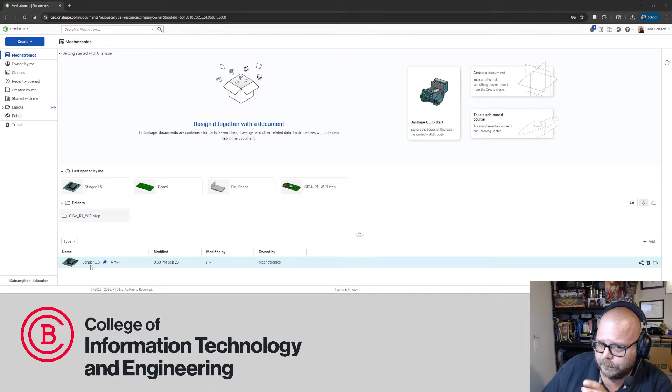But last week when we got started - let me open this up here - we got done with just the platform, the portion of what will end up being the main robot chassis that will actually accept the board. This is where we left it off, and I have to say, this was a hard thing to walk away from. I mean, I'm a design nerd, I would have loved to finish this guy.

But you run out of streaming content in a week's time. So I think the goal for tonight will be to see if we can get motors and batteries in this guy, at least, if not further. Of course, we'll keep going.

My plan for this series, besides just working on this redesign, is to go through my thought process - what a designer is thinking about as he goes through these things. So I'll talk through a lot of those thoughts. It's very stream of consciousness - there's a lot of undo, a lot of delete, that kind of stuff. So let's hop right in.

So we left off here with what we called the chassis, and these little cutouts are intended to allow - I'm going to make this guy transparent. I'm still learning Onshape and remembering where things are. There we go, make transparent.

Now, one thing I haven't figured out coming from SolidWorks is how to make this transparency permanent - in SolidWorks, when you change transparency, it stays that way until you turn it back off. But for now, these little cutouts in what will end up being a 3D printed chassis are to allow for the pins and solder blobs on the bottom of that main circuit board to fit, so the board will sit flush.

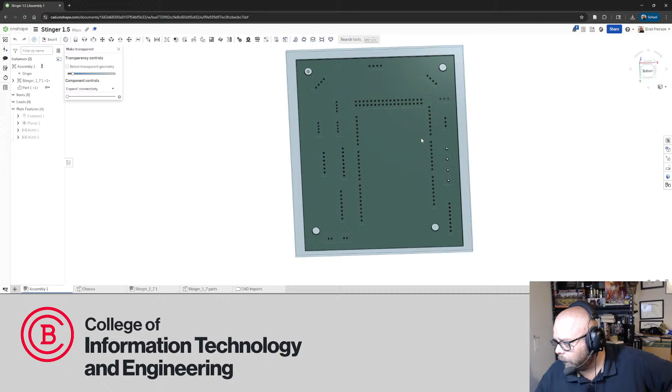If you watch the video from last time, we just guessed at how deep and how wide things needed to be. Looking at the actual physical circuit board, as long as we're outside the white silkscreen printing where the letters and stuff will be, we've got plenty of room. The solder pads aren't very big at all, so these pockets will be just fine where we've got them.

I'm going to flip over to the chassis, and I think the next thing to do will be to create the screw pockets - or rather, not pockets, the bosses, since we need more plastic. We're going to insert these screws. Let me switch to full screen and see if we can get a decent view.

On this version, in the original, I told the students not to worry about inserts. I've had very good luck in the past with just running threads into 3D printed parts, and actually this one will be better to show that. The thing I wasn't counting on when I gave them that advice was there's very little bite on these little M2.5 screws that hold a lot of these other accessory circuit boards in place.

So in all cases on this redesign, part of the robustness is going to be using these little guys - little brass heat set inserts. We design a hole for these to go in. There's a little soldering iron tip designed to fit right in the diameter. You get it hot and just push it in place.

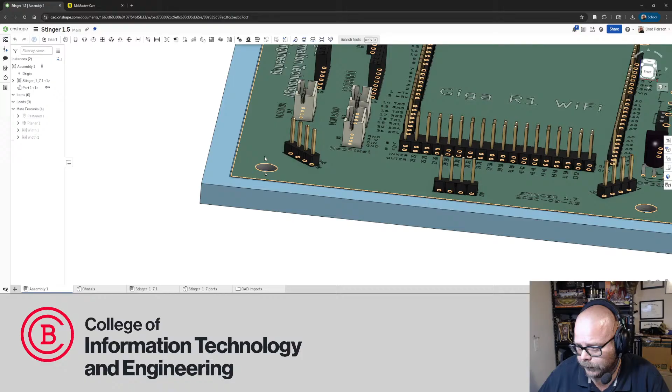So I know for a fact that the screws I've designed that circuit board for, this guy, that these were clearanced for a 1024 screw.

I decided we want to stick with all metric, because most of the other circuit boards that are purchased and get mounted to this robot are metric. So I want to stick with metric. It's a hole for a 1024, which, if I remember right, is an M5.

Now, my mind never converted to metric, so I usually cheat, and when I need help in the realm of conversion sizes, I use this little machine shop reference - I've been using this for like 15 years or more.

This is my go-to tap chart, so it tells me sizes for clearances. So an M5 - let's see, an M5, now these are tap sizes, that's not really what I wanted. What I probably want is something with a major diameter. It does... well, M5, 5 millimeters should be the major diameter.

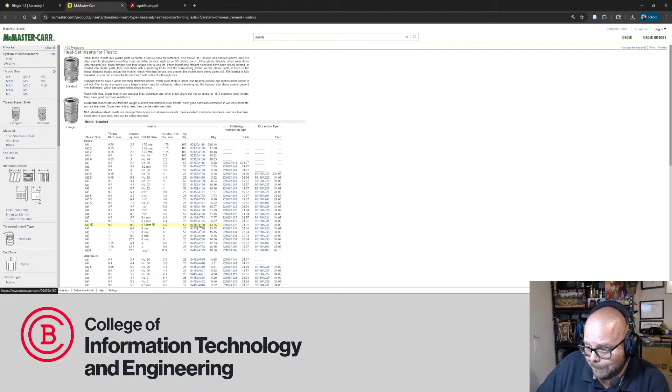My thought here is I want the deepest insert possible - not that I'm necessarily going to use the deepest one, but if I design for the deepest insert possible, that means it'll accept any of the shorter ones. So for M5, we come in here, they've usually got a drawing telling me maximum hole diameter is 6.5 millimeters.

General rule of thumb, if we were tapping this hole - and I'm not going to tap it - is that we need a wall thickness, or the boss, to be double the diameter. So we would add a screw boss at 13 millimeters, and that's kind of what I'm going to stick with. There's even less stress on this if I decide to heat it when assembly happens, so that rule may not strictly apply, but that's what I'm going to go for anyway.

So 13 millimeters, converting again on a handy dandy graphing calculator - I'm even a nerd, it's the same graphing calculator I had in high school.

0.511, we'll call it a half an inch. Now I have to think, how deep do we need? That drawing should have a minimum thickness of 10.3 millimeters. Back to the conversion, divided by 25.4 is 0.4. So I'm going to just go 0.5 deep and 0.5 in diameter.

I'm going to sketch on this surface, and actually I want to do it in the part, not on the assembly this time, because these are going to stick down. We're going to sketch, give me a good straight-on view, and just start dropping in circles. Right now it doesn't matter where or how big, because they're all going to be the same.

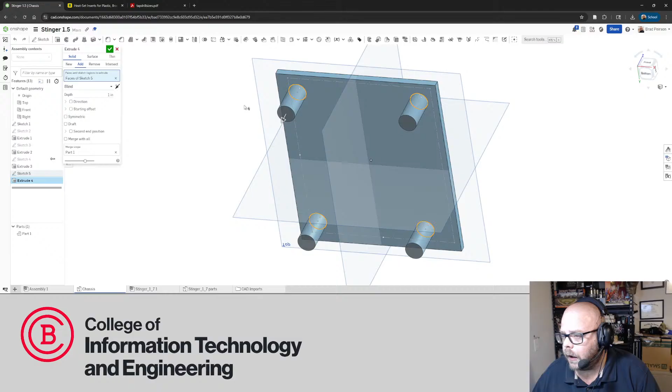That's all we need for these right now. Grab that sketch, extrude it, and we definitely only want a half-inch. I don't need the full half-inch off of this bottom surface though, I need the half-inch off of this surface. So I am going to attempt, let's see, blind is correct, but there should be a starting offset?

Is that right? Nope, we don't want to do that. I thought that there was a way to send this. We don't want to do up to the end, these are all end conditions, so that's not gonna be what we want.

Now the question I'm asking myself is, did I really want to sketch it on the bottom? Because I could have sketched it on the top, extruded a half-inch that way and just been at a half-inch or whatever. The other option, if I want to get lazy, is just call this good at a half-inch from here. But part of my goal in the back of my head is to keep this thing as light as possible.

So what I'm going to do is see if this will allow me to change the sketch plane. Let's see, rename copies, show dimensions, add selection, hide. Hiding doesn't do me much good. What if I just, can I edit? Look at you, sketch plane. What if I change you to here?

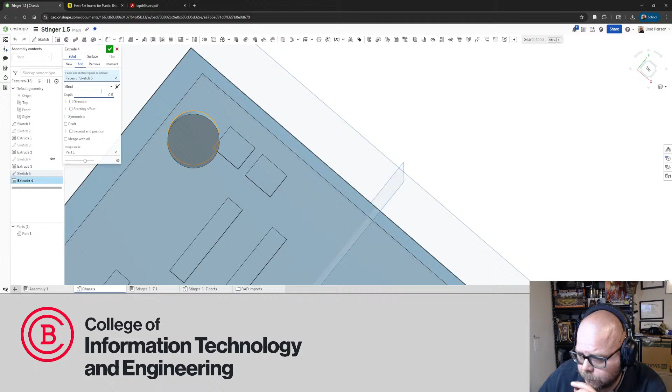So I'm going to extrude this. I'm going to give it my half inch, 0.5, because overall, whoops, wrong direction. So edit, wrong direction, that way. So now from here, if I select both, I should have a half inch, yep, down here on the right. And here's going to be something less, so 370.

Now, that's ugly. We're probably okay because there's so much extra clearance in all of these pockets. Did it hit any other ones? Doesn't look like it. We're probably okay.

I don't like it, so I'm going to see if I can't, because we didn't define the screw boss features based on these pockets, I should be able to grab them and drag them up above. Will you let me? There we go. If I drag them up above, maybe. No, did it? No.

That's the cutout, yes. Oh, it just took it, okay, it just took it a second to re-render. Yes, so now my screw bosses are above, it cut through, everybody's happy. I do that quite a bit, sort of cheat it, to get things to fit that way.

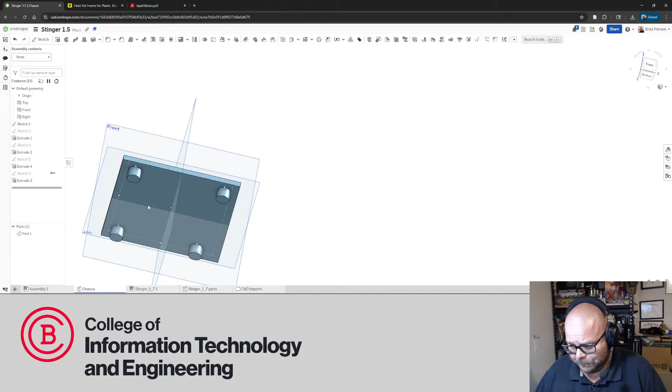So next, that's right, and so for a similar reason as what I just did, I'm not going to put the holes in right now.

I envision drawing the motor, adding the motor mounts, and they'll stick in a ways. And if they happen to cross these screw bosses, I don't want to fill in those holes, because there's the potential to have a lot of features that I have to drag up above and remember what things are and stuff, and I don't want to do that.

In the case of the holes for those inserts, I think it's going to be better if we just leave it and do the holes after, and we can do that anytime. I've got the sketch, right? I can drop holes right in there, be nice and concentric. Everybody's happy. So I guess let's go after the battery.

And for that, we were at Adafruit for the battery. It's the Adafruit website. And I'm working from memory here. I do have the bill of materials, but if I remember, we were at this guy right here. What is their part number? So 5035 is Adafruit's part number. A 10,000 milliamp hour battery.

Now, it turns out with the actual use of these robots, this was insanely overkill. I want to say I ran this thing for 8 hours a piece at 3 separate career fairs and never had to charge one of these robots. So insanely overkill. I like it though. That means that I'm not likely to be stranded in the middle of a career fair with dead batteries. So I'm going to stick with this one.

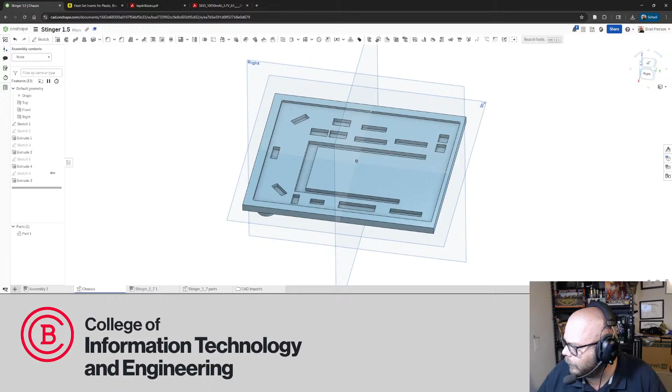So let's go ahead and pop in a battery pocket, shall we? We want to flip back over to our tabs. Now, if I want to show the top view of this thing. So with how that is oriented, I've got the battery in the back of my robot, and we're oriented this way. So we're going to be adding the battery pocket on the bottom of what's the top in this view. So here. And I can extrude it off of this face or the bottom. It's not really going to matter much. I think I'll just do it off the bottom.

Let's sketch. We'll create a rectangle. I think I actually want to draw this rectangle off funky, not centered, on purpose, because I want to grab the center. Can I grab the center? Will you let me? Well, when it won't let me grab the center, I'll just drop a dot in. Drop a point, grab that point and this edge and constrain it to the midpoint. There we go. So now we're centered.

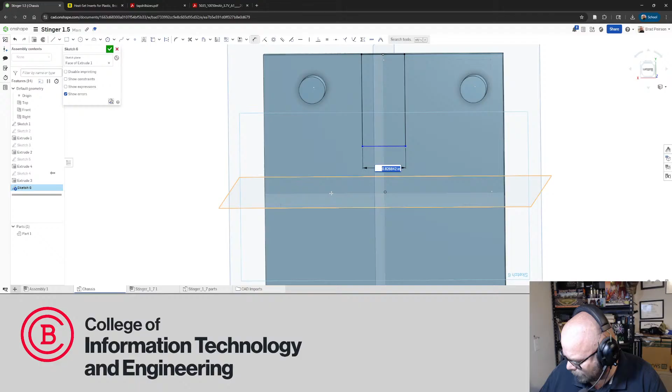What did I say I had to have? 2.25 wide, but we've got to add wall thickness because we're going to be extruding the outside and then extruding a cut into it to actually sit the battery in. So 2.25, dimension, where are you? Right there. 2.25 plus wall thickness. 1/4 inch is a little beefy. So if I went 2.5, that would give an 1/8 of an inch per side. We could try it and see how it feels once we get it in there. So let's do that. 2.5.

And this is exactly why I didn't want to cut into that hole, because when I extrude this, it would have filled in the hole, and then I would have had to remove features. So a little bit of planning ahead. Not that I plan everything ahead, but so 2.75. If I want an 1/8 inch wall, I really only need an 1/8 of an inch because the back is going to be open. So 2.75, make it 2.875.

Is that actually going to work? Now that I'm looking at my physical one, I'm looking at where those screw bosses ended up, and I'm thinking I'm not going to end up liking that placement. If we cut into this screw boss too deep, we won't have enough wall. We should have enough wall for the brass insert, but what I'm worried about is the brass insert's going to impede on the inner area where the battery needs to sit and not give us enough room to squeeze the battery in there.

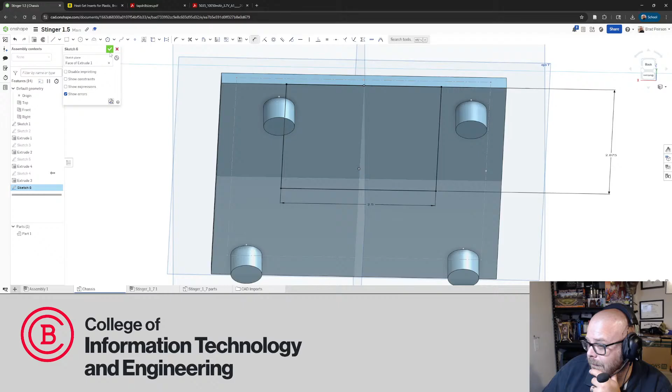But the beautiful part about CAD is it can be undone, so let's do it. Why not? Extrude out. Oh, it helps if you select a sketch. Select the sketch. We definitely don't need the inch. 0.75. And again, if I'm shooting for an 1/8 inch wall, 0.875 gives us that, right? If the battery was 3/4, 0.875 gives us that. It looks kind of funny, but if the goal is light, at some point funny might be the order of the day. So for now, I'm going to call that good.

I'm going to go here and do another sketch to produce the battery cutout. Now, the question, how fancy do I get? Because this battery is shaped like what in SolidWorks would be a slot. I don't think there's a slot tool here. Maybe buried in one of these guys. There's an ellipse. Yeah, I don't see a slot. This shape, rounded on the ends. Do we want to get fancy and make the pocket for the battery rounded, or just cut a rectangle? This one is just a rectangle, but this one was designed to go in sideways, not lengthwise.

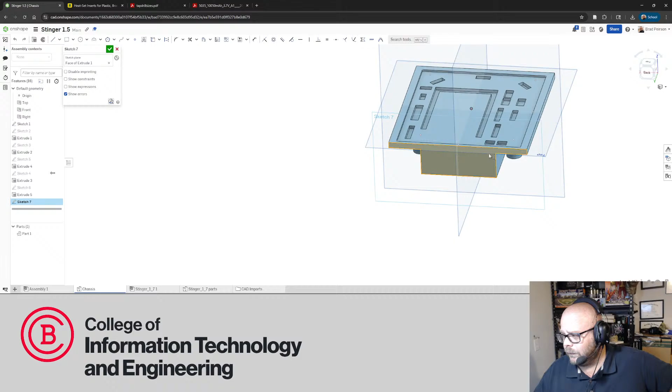Let's do it. We're 3D printing the thing. We can get away with some nuts. This is already well out of the realm of anything I would design if we were shooting for machining. If we were, I would very much be going the route that this one took, where we start out with a block roughly the size we need and start cutting into it. The whole idea of starting minimal and adding on is that I know I'm going to 3D print it, and we can get away with some crazy stuff on a 3D printer that I wouldn't ever attempt if I were machining.

So let's sketch this here. I know I want an 1/8 of an inch wall at least on the bottom. So let's do that, because that's the way I designed it. Once we get all the rest of the dimensions of the battery in here, we should be good as far as clearance. We can't go too tall. Remember, we've got to be under this level in order to give our pins room on the circuit board. So that's going to be the driver, to make sure it's low enough. That height was 3/4 of an inch; I'm going to bump it up.

I mean, 5 thou should be okay. That will probably end up snug. Like I've mentioned in the past, I don't really have the printers at Baker dialed in the way I do my Ender here at home. Like I know here I can hold 5 thou without a problem. The ones at school I haven't played with, I don't know what they're actually capable of.

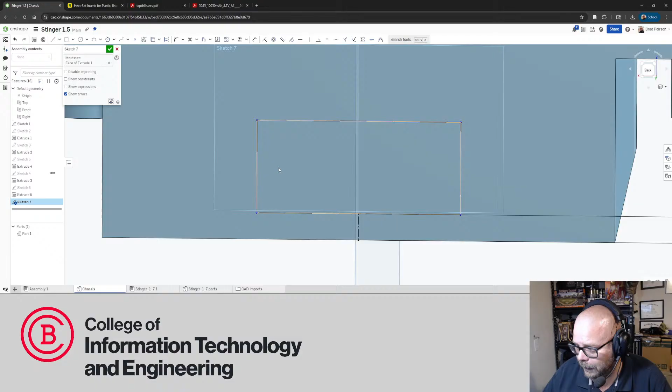So what I did was grab a line from the midpoint of my sketch to the midpoint of this face, or this edge down here. I am going to set that to construction so that I can set it vertical, and that's now going to center my battery pocket, or what will be my battery pocket. Now, width was 2 1/4.

Actually, if we're going to plan for the fact that it's oval, that 2 1/4 was this 56. And they say that that's max. I got to be honest, I don't trust that that's max. So if you see max on a drawing, I should be able to create my pocket at, say, 56.6 millimeters, and it'll fit in every time. I don't trust that they're holding that. I just don't. So we're gonna go with the safe play.

However, to make that work, and we want to go rounded, so I'm going to construction both ends because I don't have a slot tool. And then I'm going to grab arcs and make one. Looks like I have construction still on. We can fix that. So drop those in. They're already fully constrained. They should have tangency. Oh, they got midpoint, even better than tangency when you're doing this. So select them again and unconstruction.

There we go. Now, because I have the dimension from here to here, I need points there in order to dimension it. So I'm just going to drop points there, and that was the 2 1/4. I'll give it 10 thou, 5 thousandths a side. So 2 1/4 becomes 2.26. That somehow seems as if my math was off, does it not? No, 56.6 is correct. Is there another? Okay, I just haven't defined that yet, that's all.

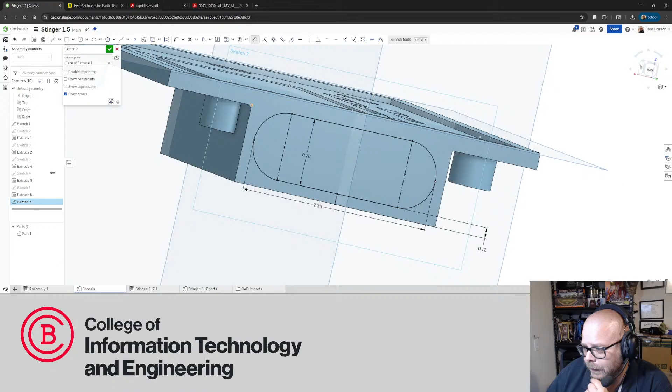You know what I could do? I could drop this down, 0.12, to account for that extra 5 thou. Now I should be perfectly flush with this. Who's going to stick a micrometer on my 3D print to make sure that that was exactly 1/8 of an inch on the bottom? You know what I mean?

So now grab that sketch, extrude it. We want to cut, so we need to hit remove, and 1 inch isn't good enough. It's 2.75 on this one. I'm going to make it even deeper, because I know for a fact on the end of these batteries are little boogers of the shrink wrap. Come on, slide out of there. Well, I guess a yank is about as good. Come on. Just get enough to get my fingers on the actual batteries.

So there's some extra goodness here where the solder connections are, and where they're welded on the end. They're not perfectly square. I'm going to give it 50 thou on the inward side and hope. At the end of the day, if it sticks out a little bit at the back, it's not really a big deal. So we'll go with that. If I give it 50, that's 2.8, right? 2.8 deep.

And that gives us a very, very thin wall down at the end. Ouch. Ouch. But that should be okay? Question mark. Accept that. Again, I mean, this is CAD design. There's nothing here that can't be undone. The reason to go through all these thoughts and the design process is it's a lot cheaper to change it right here than it is after I've, you know, spent 12 hours trying to print this thing.

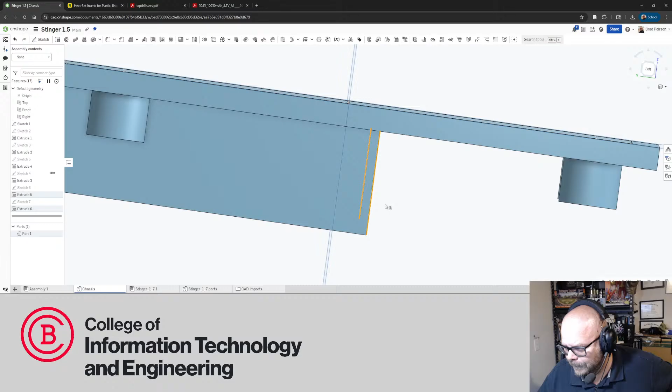Why don't I do it now? I mean, I just got done saying that things could be undone, so let's give it a good healthy fillet. What was the radius on this? 3/8. Okay, because in my head I'm kind of thinking in the end I would like this to be a nice radius that sort of matches the inner pocket. So we'll give it a good healthy radius and see if I can fit that all the way around. 0.63 is definitely not big enough. What did I say it was? 0.4, something like that. Let's grab that. I mean, close enough for when it's printed in plastic, right? Not perfect, but let's grab that.

What happens if I do it here? Okay, it is not going to like that, I don't think. If I remember right, when it turns pink like that, it is something it's not happy with. Let's try it. Yeah, it didn't like it. Edit. That would be the last one there. So it likes that, and then we can probably get that same all the way around if this were the end game, but what it really doesn't like is that end. And probably because we're filleting into the pocket. So I'm going to go ahead and make that deeper.

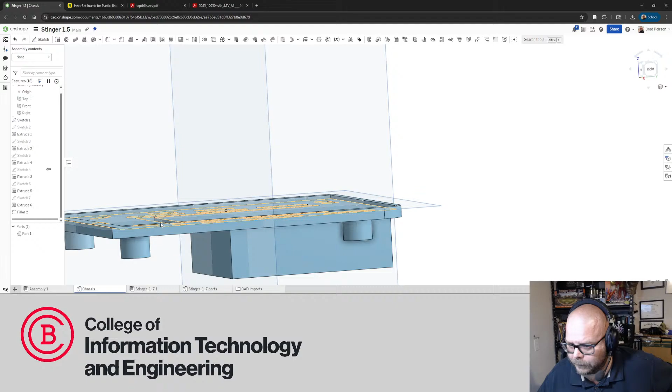I don't like that. But like I said, I'm saving all the filleting for the end because as I start to add more and more features, what I've found in the past is if I fillet this corner, in fact, I can do it and delete it. Let's fillet that corner. What I have found is that if I do it now, inevitably, 10 hours from now toward the end of the design, I'm going to want to dimension something to this corner and it's not there anymore. So then I got to go back anyway and delete the fillet, and it's just a mess. So why bother? So let's delete the one that's broken, delete the one I just did. So I leave it till the end most of the time. And that wasn't always something I did. That was something that I learned to do after getting my ass burned many, many times.

So really what I want to do for now, that's the cut. That's the meat that we're cutting. I'm just gonna add some to this. For now, let's just go 1.125. Add a quarter inch to it. Whoops, that's depth. Cancel. I've got to change the sketch because that's how we defined it. Edit. So if I want to add a quarter inch, where are you? Okay, so it's going to be 3.125. I still don't know if that's going to work for the big fillet I want maybe at the end, but let's see.

Let's try it. I go here now. Now it's happy there. If I go here, it's happy. Okay, so that tells me that'll be enough. And then can I still go around? Whoops. Get rid of that face. There you go. I want that edge. So, we can play around later. At least it's happy doing that, right? Can I select that? Cool. So, I mean, that'll be kind of a cool profile when it's done.

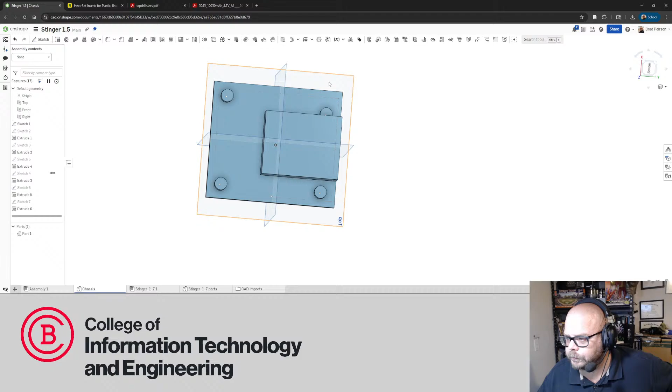So yeah, that's enough material there. How big do we look? It's not terrible. I mean, it's a quarter inch, right? Or 3/8 maybe. So it's not a ton of extra weight. In the future it sets it up for kind of what I want it to look like. So we'll call it good. Yeah, and that's really, for now anyway, all that's left for the battery.

Now I can foresee, so out on this edge of the PCB, let's go to the assembly. And bring it back to the view we had. This where it says power boost. That's the booster that takes the 3.7 volt battery up to 5 for the rest of the sensors in the Arduino. So eventually the battery wire has to go out and plug into a PCB that will be mounted on this connector.

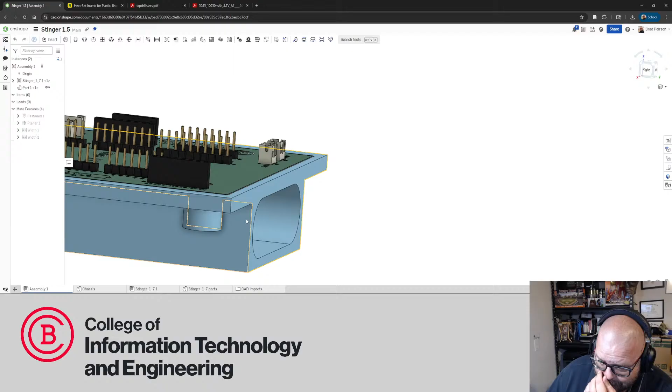We can and probably should in the future, when we get that far, make a nice little cutout here so that the wire has a place to rest. And maybe we throw a piece of electrical tape over it to hold it down, or we even design a cover or something. I don't think I like the idea of a cover. I kind of like the idea of leaving it open, but you get the idea.

Something, we can come up with a place to put that wire later, or realistically, it can just sit out there hanging in space. I mean, we've got nothing too complicated. The power board or booster, let me unplug the USB here. The booster is something, where are you? Something very small like this.

The battery, in the view I've got right now, sits on just like this, and the battery plugs in on this outer corner. So we can just leave it out in space if we want. We can tuck it in, come up with a nice channel to run it through. All kinds of options. So we're going to call that good for the battery for now. The battery should slide right in there, be happy.

The next thing I would like to do is go with the motors, and get the big blocks similar to what I just did for this battery, get similar features in there for the motors. And actually, in looking at this, I think we're okay on that screw hole. This is the way my mind works. I just jumped thoughts like 6 steps ahead. I'm still not going to put the holes in because we're not done adding plastic yet, but we're probably kind of okay.

So motors. I'm going to pop over. This was the tab. Those also came from Adafruit, and like I said, I do have the bill of materials. I'm being incredibly lazy and not opening it, and I'm just going to find it on here. It was their gearbox motor. It was the TT motor with the metal gearbox.

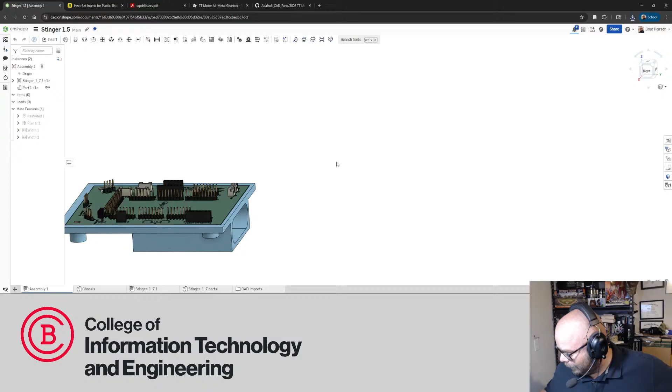I can come here, insert, import rather—step. I'm going to create this composite. Again, I don't fully understand this composite part because sometimes instead of an assembly you get one part, or sometimes it doesn't—it gives you an assembly anyway. So I click it and hope. I got to be honest, that's sort of what I'm doing. Give it a second. All right, it's been imported.

So we got a part. We got one part—looks like it came in as one part. I'm kind of curious if...

Now I've got one of these in my hand, and I'm going to point something out when it comes time to put this in the model. But first, I'm going to try to get it in the assembly.

I want to see if it's actually a part, or if I drop it in here, things are going to move. So let's do that—let's insert. It doesn't call it a part.

Composite part, there we go—TT Metal Gearbox. I don't care about the color, I can set appearances and stuff later. In fact, that's something I'd like to play with. I was Googling around, and it sounds like this has a pretty cool render functionality.

So I'm just going to mate this guy. Though if the whole thing moves, I mean, it's not looking like an assembly to me, so I think we're okay there. The whole thing moved. So I'm going to get rid of that because I actually don't want that planar mate, since we haven't put any material in to mate this thing to yet. Let's get rid of that.

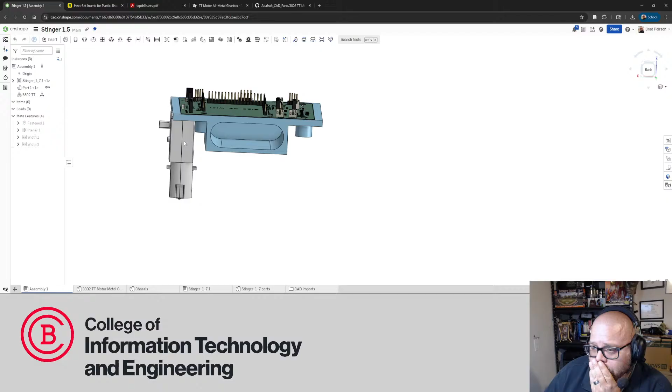Now we have to sort of make some decisions because I don't have a great reference. I would prefer a technical drawing. And while I was able to find this GitHub repository, I was never actually able to find a good CAD drawing of the thing.

There's nothing in here that I missed, right? STL is not going to do it. JPEG's probably not going to do it. Nope, that's just a picture of the model—I got all excited there for a second. So let's go back—yeah, none of these, STL, step, none of these are what I need.

So I don't like this. I would prefer a drawing, but there's two ways I can do this, and I'm actually going to do both because this makes me nervous. I need to know the hole pattern, the mounting holes—so there's 1, 2, 3 mounting holes, I need to know where they're at. I also need to know the dimensions of the motor itself.

What I'd like to do is inset it into plastic, sort of the way that—I need to invert or de-invert my camera for the next stream.

But sort of the way this one is, where it's cut in, I want to do the same sort of thing, just to give it a little more support if things get torquey. They shouldn't, but I want to have some plastic there to help it out, not just rely on the screws that are mounting it. So I need dimensions off of this guy in order to know what I need to model here.

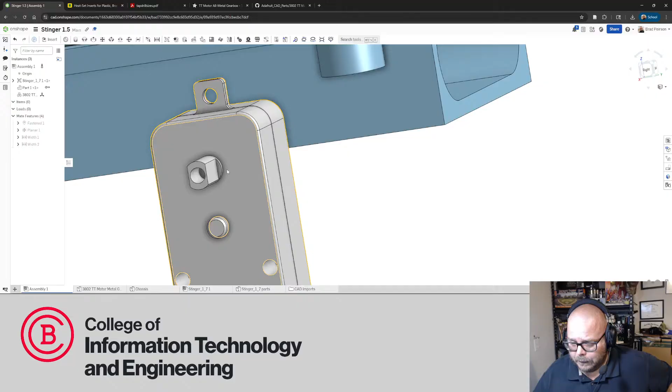The reason I don't necessarily like that is I don't trust that this is accurate. One of the big reasons is if we look at this motor this way, these two tabs are here, and then the whole mounting surface is flat.

The actual motor is not flat. Where those solder connections are for the leads, there's another bit of plastic that hangs out. I think it's intended to protect those a little, but it is definitely something that makes that whole back surface not flat. So I need to account for that, and that's one of the reasons I don't trust just using the solid model, and why I say I would really like a CAD drawing.

What I'm going to do is reach into one of these drawers, because I didn't prep any of my measuring stuff. I'm going to grab a caliper so I can get a depth and a sanity check to see how much I can trust this model, by checking easy features and seeing how accurate they are. So from here to here, that little tab should be 118.

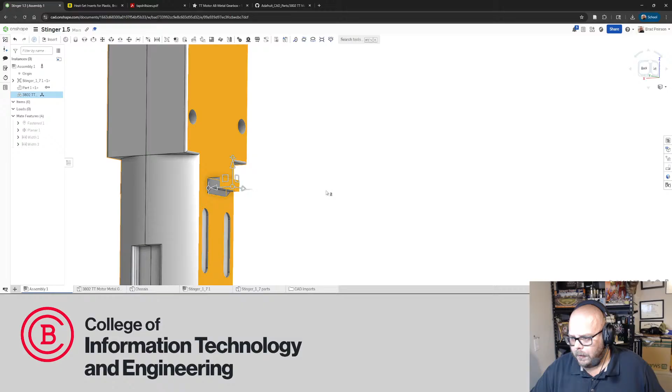Tighten that back down, check it again. I was off by more than half a thou, but what's the point of a tool that's not reading correctly? That's only like 75 thousandths, so that's not even 0.1. Shorter's good - if I make a pocket to accept that, deeper's better.

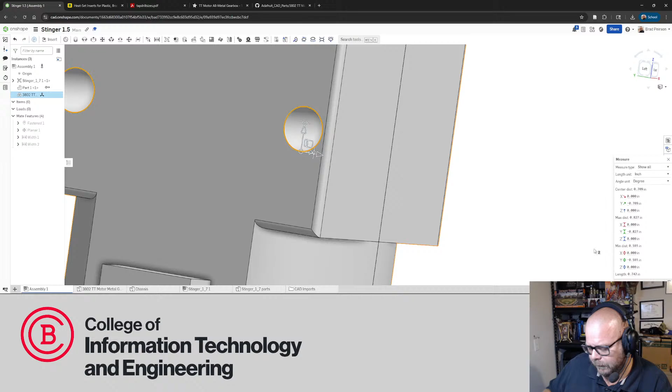And what does this one measure diameter-wise? The other one, out in the back, 118, also diameter, so pretty consistent there. What are you telling me your diameter is? 118. Well, I'll take it. So they're the same, all the same diameter. I'm going to write that down. 118.

Because now I can go back to that tap drill chart. 118 on a clearance. Let's pre-convert that. 0.118 times 25.4, right about 3 millimeters. So 3 millimeters, if we look over at the clearance side of the world, a 3 millimeter screw is going to be too big, right? Because this is 2.997, what 118 comes out to.

So 3 millimeter screw, I might go with a 3 millimeter. That, again, that's for clearance. Do we want to end up through it? We want a mounting screw? I mean, maybe. M2.5. I suppose we could go with 2.5. I'm trying to think, because I bought for the prototype the other student did, some screws, and I'm trying now to think what I can recycle out of what we already have. Unfortunately I don't have them here at home, they're on my desk. I believe we bought M3s, M5s for the big circuit board, M3s for one of the other ones, and I think we bought M2.5.

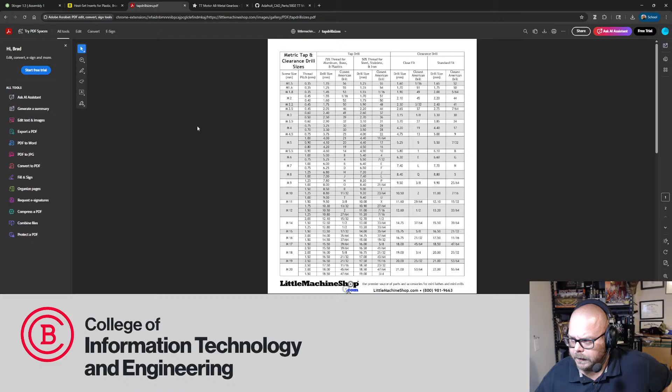A little bit of drill. That's not what I wanted. I wanted this. So we got to get this guy in here. Now, one other thing - ooh, I can't measure that, I didn't actually get the wheel off. I want to know how deep this thing needs to be set in.

So looking at this, it looks like this motor physically in my hand sets the wheel way further out. Like this shelf looks way further out from the body in the physical motor than it does in the model. Ooh, and they dripped super glue down there. That's not great. Anyway, so what do we want?

We want to know the height of that shelf, and it is not much, let me tell you that right now. In fact, I don't even think I can measure it. I think I'm just going to trust the CAD, because there's no way I'm getting any of the tools I have here to measure that shelf. So we're going to trust the CAD.

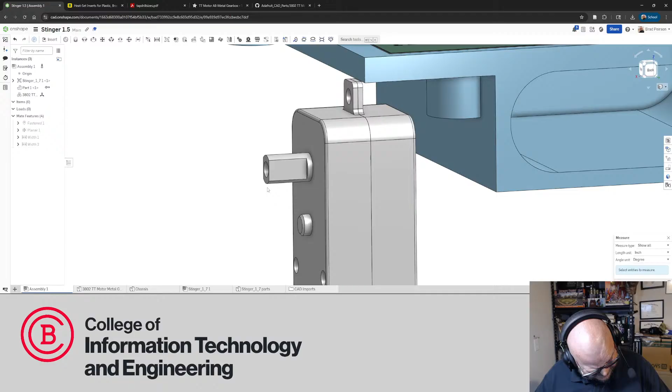What I'm going to do is plan for this surface to land flush with this surface. Right, that'll be my goal. That way, the wheel should be outset beyond that, at least this distance - which, again, looking at the physical motor, isn't a ton, but it is clearance. I mean, an inch is a mile, right? Stick with what you got.

So, best way to do this is going to be what? Best way to do this is going to be what? I think what I'm going to do is, similar to what we did with the battery, I'm going to grab this surface, draw the box that this thing's going to fit in, and then cut into it for the motor. I think that's the plan. I think that is the plan. I think that is the grand master plan.

Yeah, so let's do it. Now the only other question - like I said, this end of the motor, it says on the model that this whole surface is flat. It is not flat on the physical. Where those wires are is an extra bit of plastic I got to account for, if I can get it lined up. Now my question is going to be, should I let that hang out the end? Like, should I let that, and it's going to be, how big is that?

If I let that hang out, I got to eyeball it because the shaft will be out there. The motor shaft will be out there too. Eyeballing where that motor shaft is, that's a total of pretty close to 400 thousandths of an inch, call it half. That'll be sticking out the back. I don't think I like that.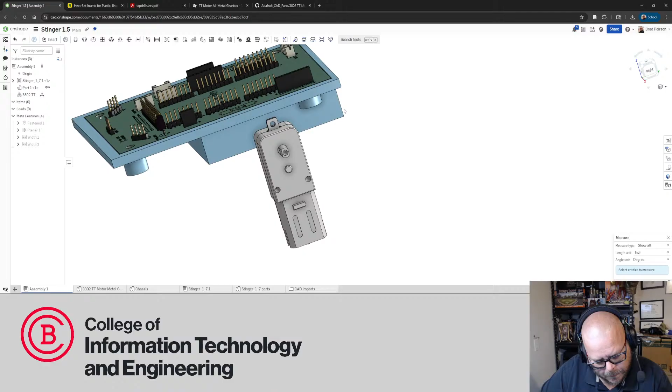There's one other consideration, and that's going to be the fact that I need to make sure the power board sits on this connector and hangs off in this direction. And I need to make sure that when I throw a wheel on here, wherever this axle lands, the wheel is not going to hit that power board. This whole rest of this side from basically this edge of this connector forward is wide open. That wheel can do whatever it wants as long as I get it past this plane.

Yeah. So, actually, I don't think I looked. Let's look for the power board. We got that Adafruit thing, right? The power board was, again, I'm being lazy. I don't want to open my BOM. I just usually find it by looking for battery charger. And in here somewhere, I know it's a PowerBoost right there, 1000 charger. It's this guy. It is their part number 2465.

We go here. And let's see, 2465. I don't remember finding it. Oh, I must not have looked very good. Oops. Where'd you go? 2465. I was between clicks. Rev B. Excuse me? What rev are you? I don't remember seeing a rev anywhere. What is Rev B? Tell me what is Rev B.

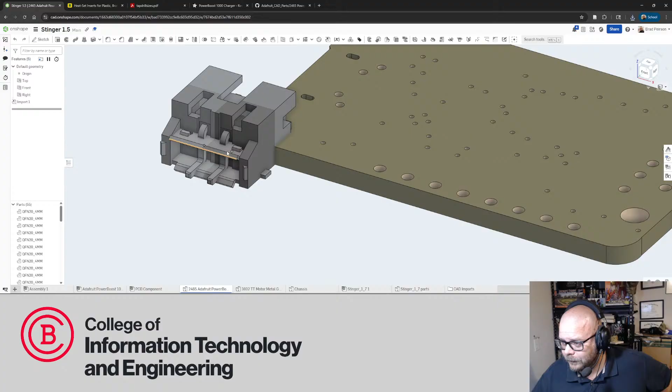Again, I'm going to click that composite. It worked the last time. I don't know if it'll work this time. Like I said, I'm very much not sure what that actually means. I have an idea, but it doesn't seem to do it all the time. Like now, notice this time I've got 2 assemblies and a bunch of parts. There's a whole bunch of parts right here all on top of each other. But then when you look, you get the actual full assembly, and I definitely don't know what the difference is between these two.

PCB component? I don't know what that means. What happens when I bring it into our assembly? Let's insert assemblies, Adafruit PowerBoost Rev B, boom. And I did not group it.

I talked last week about how to group it and save the heartburn of all these parts moving around. I did not group it because this assembly looks to me like that whole assembly, and it is a sub-assembly of this assembly. And I'm wondering, because it's buried 2 sub-assemblies deep, do I actually need to group them? I probably do. I'm about to find out.

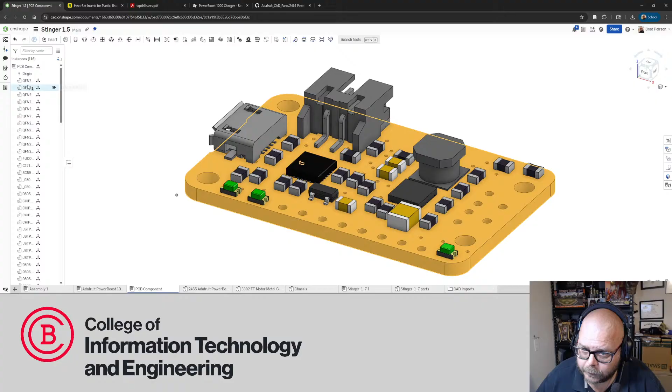So I want to mate planar this surface with this surface. And, okay, we definitely need the grouping. I'm going to cancel that. I'm going to just, I guess, start at the top down. So I like to start with the board and make that the fixed thing. So let's fix that. Then we select everything, shift everything, group them all.

Now I don't know if I need to group them here. I guess I'll find out, because again, it's a sub-assembly of another assembly. We do want a planar mate on the bottom of that board to the top of this connector. Hey, it all moved, so I guess we're happy.

Now, what I just did is not accurate. When this is fully assembled, there will be pin headers here that will include this extra height of the black here, the same height. I don't really care right now that I'm off by this much height, because if I can design it in such a way that the wheel clears this lower, that means it'll clear it higher. So that level of accuracy, to be honest, I don't care about in this design. It's just a thing I'm not even worried about.

But what I am going to do, I can't, well, I could. I really could. In SolidWorks in the past, I have mated holes like this to square recesses like this. I have. It's a pain. It usually requires construction sketches, and then you mate the sketch points. I don't really feel like doing all that, so I'm just going to hide this.

And I can just add slider mates or even cylindrical mates. Slider, probably cylindrical, to the holes, because the holes line up. They're on the same spacing. They have to be, otherwise my pin headers will never line up. So I can do cylindrical there, boom, and I should be able to grab one on the other end. Do cylindrical there, and the other extreme, boom.

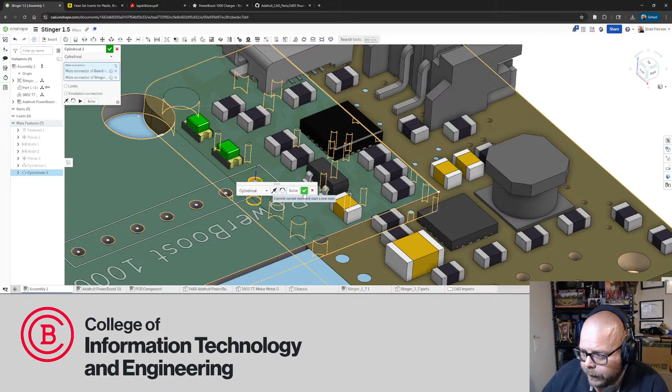We like that. It flips itself. We get rid of that. Nothing is red. It's happy. If I grab it, it's not dragging around. Cool. Let's see, though, I hid something that I now want to unhide. Where'd you go? I want to unhide it just to show it. Well, of course, just to show it. Why else would you unhide something? Unhide, show. So there.

Now again, it's short. It will be at least the height of this black plastic here taller. But if I clear the wheel in this position, I will clear the wheel in that taller position, right? And clearing the wheel right now is really all I care about. Now, the other option, do I want to do that? I kind of do, now that I thought about it. So what I'm going to do, man, this is me nerding out. And this is why it takes me so long to do CAD design.

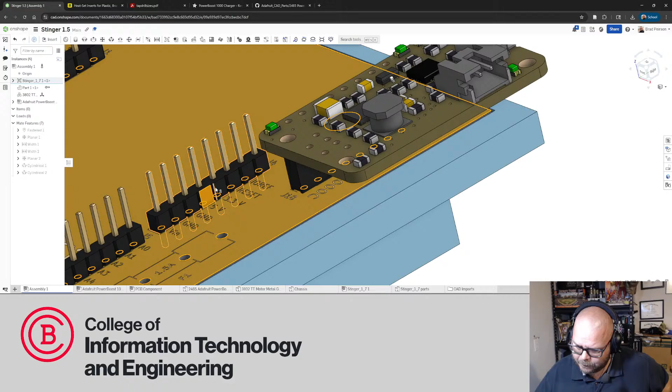What I really want to do, now how many pins is that? 1, 2, 3, 4, 5, 6, 7, 8. These are 8 pins, right? Yes. I have this part because it came in as a part of my board design. I didn't create this part. It was automatic just by the fact that I exported a solid model out of KiCad. So I've got this part by default because it's part of this assembly. I can add it to this assembly. And I'm going to take a minute and add it. I am not happy about it, but that's the way my mind works, and otherwise it's going to bug me.

So I'm going to delete it. I'm going to go into this. I might as well add it to this assembly. And insert. Stinger parts should have it. I don't know. It should be a pin header 1x8, right? Pin socket, not a socket, pin header. Pin header 1x8. Okay. So now that's in there. Now I will show you the annoyance that is doing what I just decided to do. So I need to sketch.

Actually, I can edit this in context. I don't want to really open the tab that it's on. Let's edit in context just so I can sketch on it right here. Whoa. Excuse me? Oh, because it's in the other part studio. Oh, crap. That's not good. I don't want to do that. Exit. Get out of that context. Get out of those parts. Go back here. Can I open it from here?

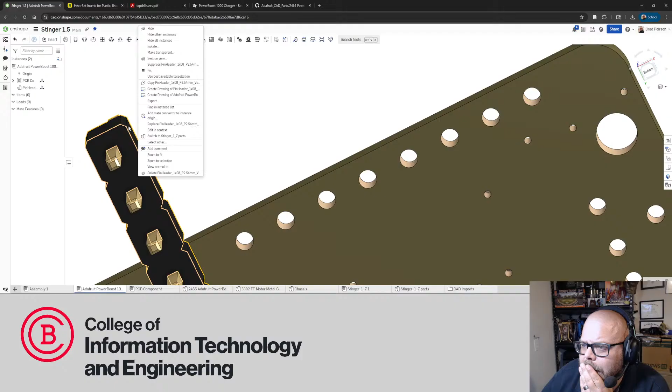Normally I would just edit in context, but given that it's on top of all that other stuff, I don't even know what pin I'm looking at. So isolate, make transparent, and I'm just trying to see if there's a way that I can just hop to it. Isolate? Nope. Let's go to the parts and see. Pin socket 1 by, or it's a pin header 1 by 8. Pin header. That.

Can I drag you? I mean, this is a part studio, not an assembly, so no, I probably can't. I don't like the way this came in. I'm not nuts about it. I don't know how to do anything about it. But I guess I can sketch. I can't select the face of that part, though. This is bothering me. Can I break that out into its own part studio? Let's see. I could. I want to create a drawing. I definitely don't want to do that. Copy.

You're not going to let me paste, are you? Not going to let me paste. Damn, that was worth a shot. Delete. Let's see. What can I do? What can I do? So if you... What good does copy do if I can't paste it? Copy. Paste.

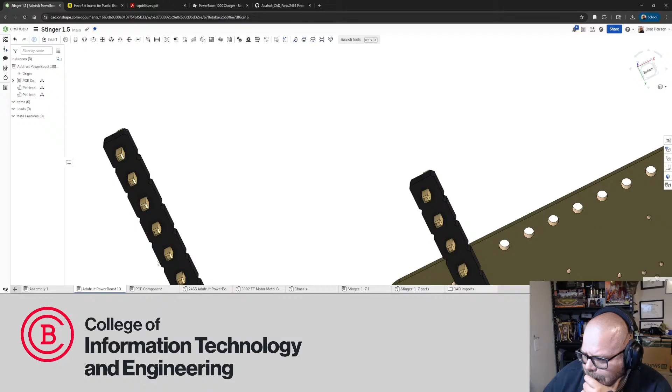Now what if I edit this one in context? It's still that one. It's still that one from the big mess of parts. I'm not letting this go. This is now, you know, my honor's at stake. So let's delete the extra one. Ooh, there's a move to new subassembly. Can I do that? Maybe if I could get this out of here and into its own part studio, I think we'd be in the clear.

Export maybe? Is there like an internal export? Nope, that's going to get it out of here. That's for like 3D printing. I don't want to do that. Gotta be a way. Hide. Oh, I could just hide the other parts. Why can't I do that? Genius. I'm a professional. Let's sketch.

Now, the easiest way I have found in the past to do what I'm about to do. I mean, first of all, don't do it if you don't have to. But I'm on this bottom surface. That is the right surface. Anyway, I'm going to sketch just 2 circles at each end, one for each end of the pins. And the easiest thing I found is, if you can, to grab these points and just make coincident on each corner of the square.

See, and that locks it down, and your circle is, quote, concentric to the pin. So when I go to mate it, it should be concentric to the hole, in theory. And everything I'm doing, of course, is because I'm a masochist, and it was going to bug me. I mean, how tall is that? I'll break out my handy caliper, because I'm so angry at myself right now for going through this. But I'm told pain makes for good content, right?

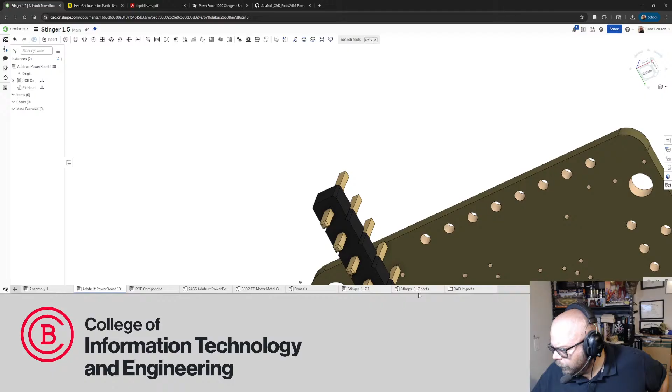I'm now going to come back to my power boost, where I should now have that sketch, which I don't, and it's not visible. And why is it not visible? Because it is not a part of that part. So what do I do? What does create a task do? Oh, I'm gonna actually tell people to do stuff. Damn it. Isolate is what I did, right? No, isolate is not what I did.

So my big takeaway right this minute is I'm not a fan of multiple parts in part studios. Honestly, it looks like a cheap and dirty way to kind of do an assembly without doing an assembly. And right now it's causing me a headache. There's got to be a way to get this part out of here. Can't pull it out of the assembly. Can I? I don't want to replace. I don't want to switch. Copy and paste didn't do what I wanted. Suppress won't do it.

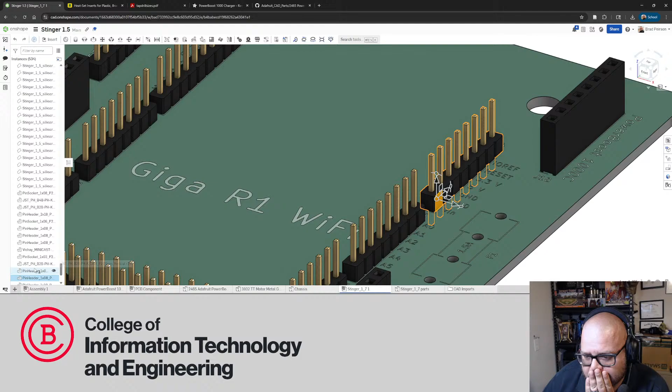I mean, the other option is to just go out and download a pin header. It's a common enough part. But I've already got one. It should not be this difficult to get the one I've got somewhere I can actually use it. So if I deselect and click it over here, 1x8, what options do I have? I don't want to change, I don't want to export. I don't want to switch. I don't want to replace.

Honestly, I have no idea what best available tessellation is going to do. Isolate, hide all, hide other. Damn. There's got to be a way to get that in here in a manner with that sketch, because I can't just sketch in the assembly.

The only way that I know that I can do that is to edit in context. Oh, sure, there's my sketch. Why aren't you visible in the main one? Does it show up? It shouldn't show up separately in here. All right, get out of that context. It shows up in here in the parts. You're starting to anger me.

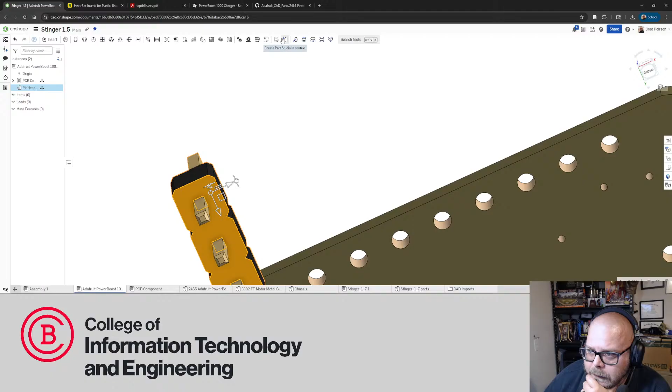Now, I mean, this might be a thing to note for SolidWorks. Like, what is this? Create part studio in context. I don't think I want to do that. Create a new part studio in the context of this assembly. Context graphics for reference. I probably don't want to do that. And if I go and select any of these,

I mean, the big problem here is we got a square peg that I got to get into round holes. In the past in SolidWorks, I have cheated and I have mated like this edge tangent to the inside of this. I'm not sure any of these mates that I'm allowed to do here. Like these are motion. I'm not sure any of these mates will actually let me do that.

Oh, there's a tangent. What if we do tangent and go with this edge? And this. Okay. And then tangent. This is it. I mean, the sketch way is cleaner, but if it gets me away from this god-awful mess I decided to create, I'm all for it. Yeah, you see how things are wonky. I think I need to edit this one. I think it's tangent to the outside, and we want to be tangent to the inside.

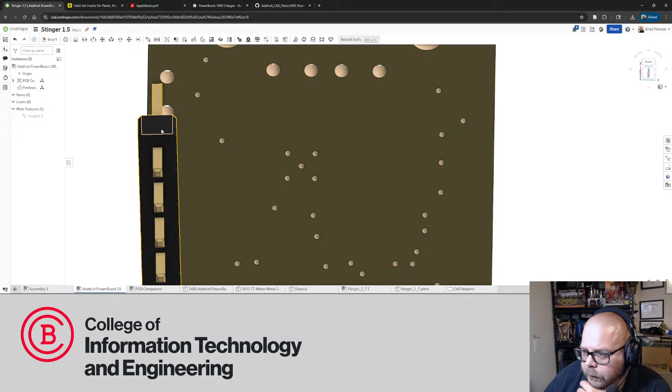Did it move? Didn't look like it moved. Pretty sure it's still tangent to the outside. Tangent. Edit. Flip. Flip. Okay. So we'll get rid of it. And now that the part is moved closer to where it needs to be, we'll try it again. So actually, let's mate it here first. Oh, and actually I did it upside down.

See, this is a consideration, and this is a mistake I made when I designed the new PCB in the first place. Make sure you pay attention to whether these boards are going to be mounted to a PCB like this upside down or right side up. Otherwise, you end up with the pins in the wrong spot, like I was just about to do. I was about to put it on the wrong side of the board. It's got to be on the bottom. So we want to be planar here. I want to flip it. We're going to be planar in that direction because it's going to plug in this way.

Now I should be able to get pretty close and do tangent. I could probably also cheat and just line up this edge of the black with the edge of the PCB. I may just do that, but let's see if we can get the tangent thing to work, because this tangent method is exactly what I would have done in SolidWorks if I was feeling in a cheating mood.

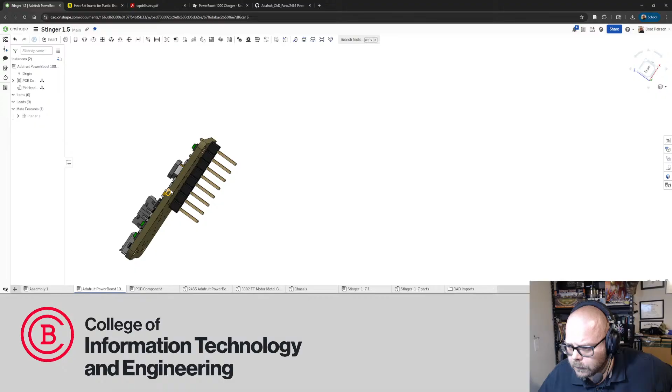So let's grab this. I got the edge, and this. Make sure it's tangent on the inside. Flip. Why won't you go tangent on the inside? Are you just trying to cause me heartburn? You should go tangent on the inside. It's also possible that I'm just thinking of the way SolidWorks would do it, and this is behaving differently, but I've done this quite a few times in the software that shall forever be SolidWorks, and it has worked before. Tangent, maybe just because I'm grabbing the edge first?

Okay. So see, the circle sketch method's better because then we'd be centered. We're not centered. I don't like that we're not centered, just from a being picky perspective, but let's do this one down here too while we're here. And good, and that should be locked down.

It's not, but this guy I don't think was locked down. Like, yeah, that moves around. I don't know why. It's like a derived assembly. So all of those are off center. They're all off center. This thing's probably cattywampus. Like it is.

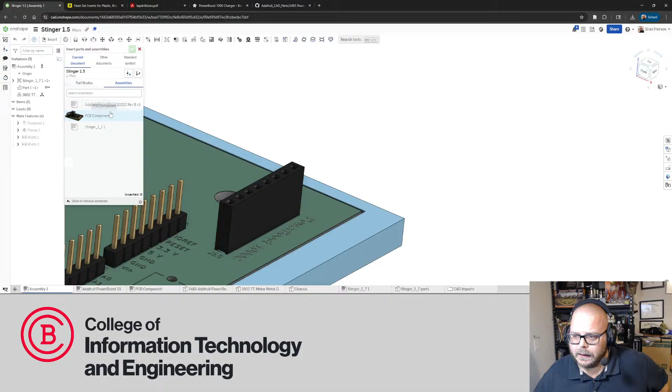I mean, I'm gonna live with it because it's really there for the height. So now I'm going to reinsert that assembly, that power boost. Crap, is that gonna float? I might have to regroup things. Let's try it. Planar mate. So now black on black will give us the right height. The height was really what I was after.

Ooh, no, the height's not good enough. Well, yes, the height will be good enough, and I will show you why. Except I have to regroup all my parts. Let's see. Go back to the assembly again. Is the group a feature? No. Can I add you to the group? Yes. No. Did it group them? It certainly looks like it didn't group them.

Let's try it. Oops, wrong. Again, alt-tabbing, back of the old SolidWorks days. So planar. I may have to go back in and regroup from scratch? Why would you not? I'm going to have to. Spikes. Oh, nope, there it goes. It refreshed. All right.

Now, the reason that it will not matter that that's all cattywampus and it's moving in tangent in weird ways is because I'm not going to use these pins to mate to this. I mean, I could. It'd probably get pretty close. I'm going to do what I did before, though, and mate the holes in this PCB to the holes in this PCB, which will make sure this lands in the right spot, which is going to be important because I am going to throw screw bosses out here in space to support the edge that doesn't get plugged in. I don't want to leave a PCB just sort of cantilevered off of a pin header like that.

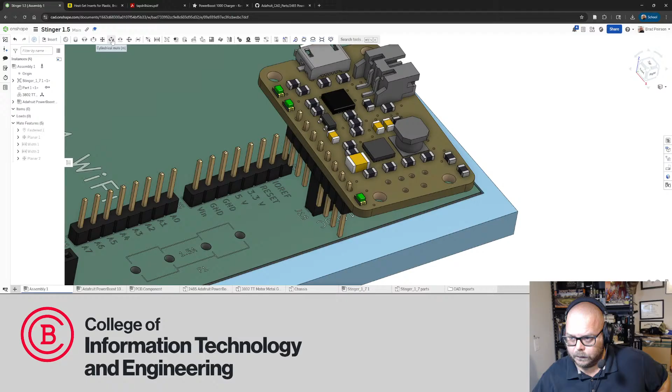So I'm going to dive back in to the, what was I using? I think cylindrical. I'm going to grab the holes. Hole here. Crap, can I hide this now? All right, fine. Get rid of that. Hide it now. Now I'll go, not slider, cylindrical. Slider would probably work. I haven't played with all the mates to see what's allowed and what isn't. But that hole is this hole. Good. Into this hole. The last hole. Good. Everybody's happy.

Again, this pin header is weird. If I drag it around, I might be able to get it in something resembling the right spot. And then it pops right back out. Cute, you pop right back out. That's just lovely. Let's show that again and see if I can mate the pins to the socket just to make it happy. I mean, it doesn't matter. Right now, it's strictly me being picky. Where these land relative to each other matters not one little bit, right?

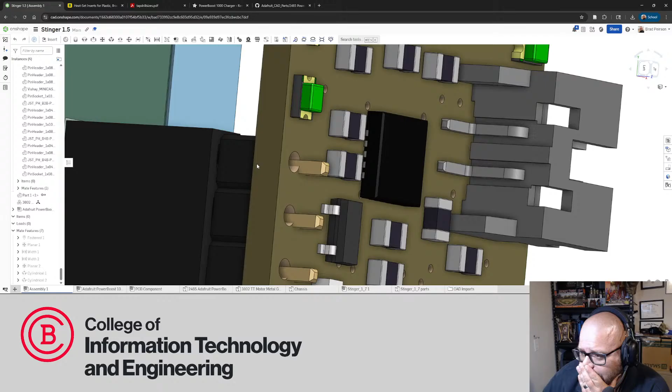And in fact, I don't even know if I can now move them enough. Part of the trick is to move them enough to see a surface that I can mate. Like if I can grab one of these surfaces and mate it to one of these, it'll probably lock it down well enough. So let's try planar here and here. Did it do it? It did it. Did it freak out? It did. It freaked out probably because of that tangent.

I mean, there's a parallel mate. What if I locked these guys parallel? Called a parallel. It's happy. Now, can I drag those around? I can still drag them around a little bit. That's all right. And what if I did it to the end? If I'm shifting that, it should be no, because it's going to be parallel no matter what, right? Let's just leave it alone. From a distance, it looks okay.

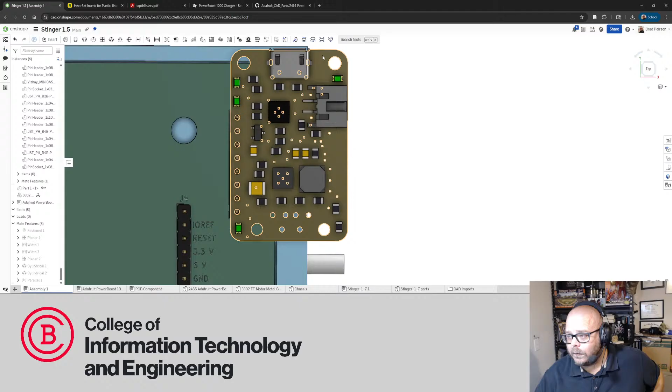And really, like I said, it was there for the height because I am going to put screw bosses here. I'm going to add plastic, since we can't catch either of these two holes because they're over PCB. I can't do anything about that. But I can add plastic out here to catch these two and give it some actual support other than just being cantilevered off of this connector. That's probably a bad idea. Those connectors really aren't designed for that.

Now, these front ones, we really are going to just stick sensors in there, but there's a big difference in that these sensors are in there, whoop, get the camera right, vertically. They're not hanging all their weight off the side.

Plus, frankly, if one of those sensors falls off the front, not much happens. This is our power converter. If this falls off, we get no power to the rest of the robot. It's kind of a big deal. So I want it supported, and we're going to support it.

That's why I needed the actual height, so we knew how tall those screw bosses need to be. It's also why I needed these mated to the PCB holes and not this weird tangent that I did, because I need to know the dimensions out to where these inserts are going to land. The weird tangent would have thrown that off by more than I'm comfortable with. This is probably as accurate as it is going to get now.

Now, finally, like half an hour later, I can get back to the friggin' motor, which was the whole goal for why I put the motor in here in the first place. That was a tangent, and honestly, at this point, 9:30 at night, I don't even remember why I went on that power board tangent, but at least it's in there. It's not going anywhere now. Let's do a motor, shall we?

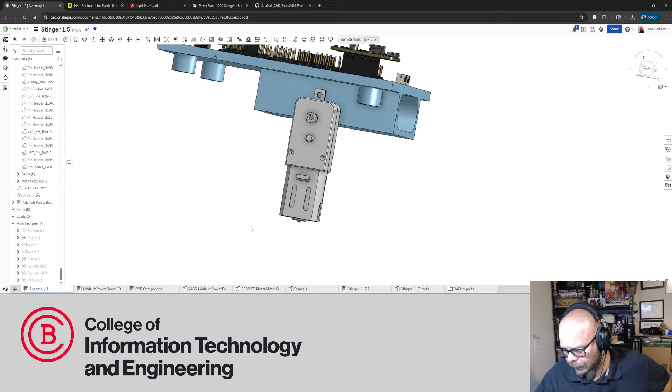Now the question is going to be, which way do we want this thing? So I'm going to throw a parallel mate in. I want this, now assuming that's flat, it may not be. It may be drafted for injection molding, which is kind of common. Parallel, come on.

I want to flip you. That works, good enough. Because the question I want to ask myself is, do I want to mount it this way? Let's drag it out here so it's clear of some stuff. It's going to end up, like I said, with the face of the motor, or the face of this gearbox, even with this edge, is what I'm going to shoot for.

And I guess, can't really mount it that way at all, can I? So if I mount it that way, or at least if I mount it anywhere near where I have it shown right now, I am right into that screw boss. There's nowhere for that brass insert to go. We can't screw our motor down. That's bad. And if this were on the other side, we'd be right into that power board.

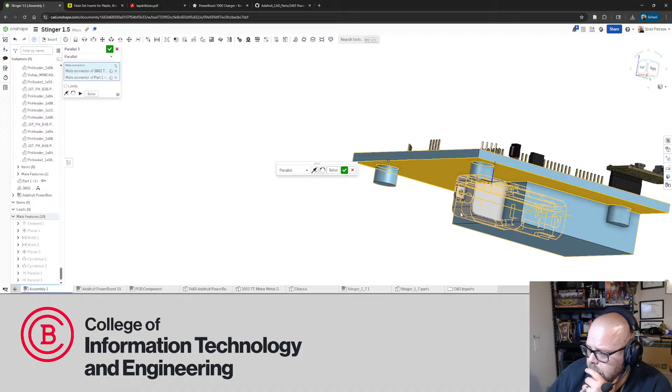All bad things. So let's first get rid of that parallel. I kind of want to flip it around. Let's go parallel with the motor to the back and the gearbox up front. Did it flip it? It did not flip it. Is that what I just said? That's what I just said. So let's go that way.

And I'm still going to run into that same problem. If I go flush here, I'm in too tight and I'm going to hit that screw pocket. So either I have to come way out here, and then what is it? My mounting screws are clear. I have to come way out here, make the robot that much wider. And make the robot that much wider.

Or I have to come way forward. Coming way forward offers its own set of challenges. One, because it moves those wheels way forward. I guess I'm trying to look and see. Yeah, they were way back on the original version. On this one, which way did we have that motor mounted? On this one, we had the wheels way toward the back.

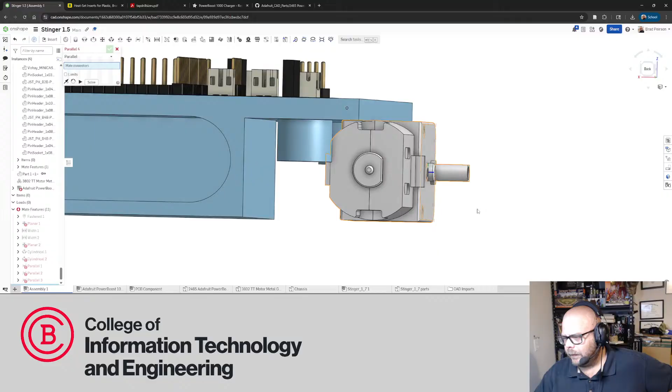And I'm just playing in my head right now. What's the best play? I got to stay clear of those two screw pockets. Well, I got to stay clear of all four of them. But what is the best play? Wheel dead nut center. Wheel dead in the center would not be terrible. In fact, it might be better because we've got two wheels, and the thing turns by counter rotating them. That would actually make it closer to a true zero turn if they were dead center. So that might actually not be a terrible idea.

Will it fit? If I want that dead center, I'm just eyeballing it, and I don't think I can get there. I gotta think on that. I don't think either direction I orient this motor... where's that pair? Oops, nope, close. Why would everything suddenly break?

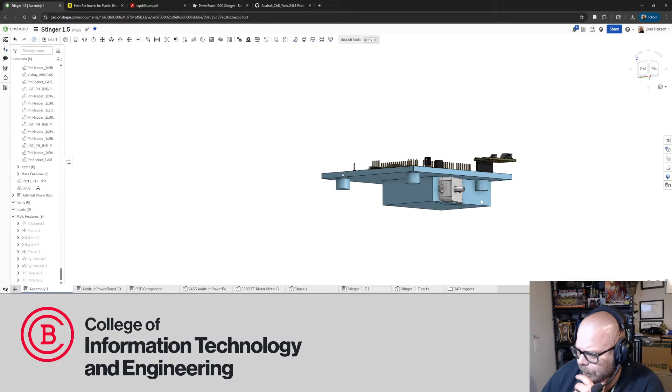Why would everything suddenly break? Okay, whatever, that happens I guess. Everything just magically breaks because you closed a mate and canceled it out, I guess. Anyway, let's go parallel, parallel this face to the outer edge, so at least it doesn't tilt on me like it just did.

And if I want to shoot for that wheel to be dead center, dead center, I'm clear there because this screw boss is further in anyway. The PCB mounting holes are not symmetric. This one's further in than this one is.

I guess a smart thing might have been to design that in, but I didn't know what the final was going to look like. So at the end of the day, something has to drive the design, right? Either the PCB was going to drive it, or something else was, you have to start out with something fixed to design around. There are so many variables in the start of a design. If absolutely everything is allowed to be variable, you're never going to get anywhere. Even if it's just, I need to draw this at 0,0, right? That's a decision. You picked a place to start.

Some of these decisions can be changed later, some can't. Technically the PCB could be changed, I could move that other mounting screw in, and probably I'd have to move these connectors. But I don't want to do that because I've already ordered the motor and the PCBs. They're already sitting on my desk. I really don't want to do that.

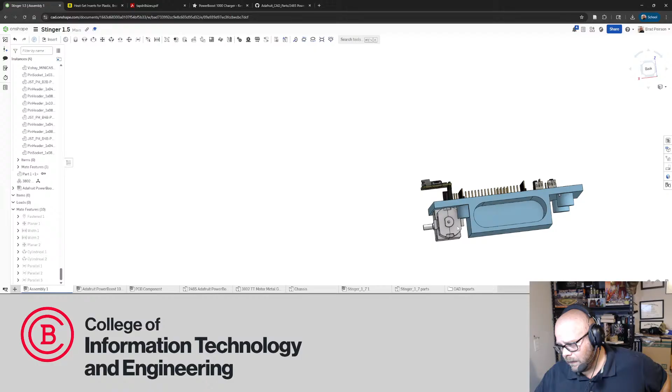And yet, are we? Yeah, we're kind of into it. And yet, maybe not so bad. Let me cut the crap and throw another motor in there on the other side. I need the derived parts, throw another motor in there so I can see what's happening. Parallel, parallel, parallel all day long, parallel with the outer edge. That's good for now.

I don't want to mount the thing vertical because then we're going to be ridiculously tall. And besides, the wheel is 2 inches in diameter, which means in order for it to even hit the ground, it would have to be mounted vertical the other way than shown, which would go up through our PCB anyway, which doesn't really solve any of our problems. So what do we do?

Well, I got one in there that way. Let's put this one motor forward and see what it looks like. Parallel this guy to this guy. So put this one in basically now in the opposite way on purpose. I'm trying to come up with a design that's going to face them both the same way, but for now I just want to see.

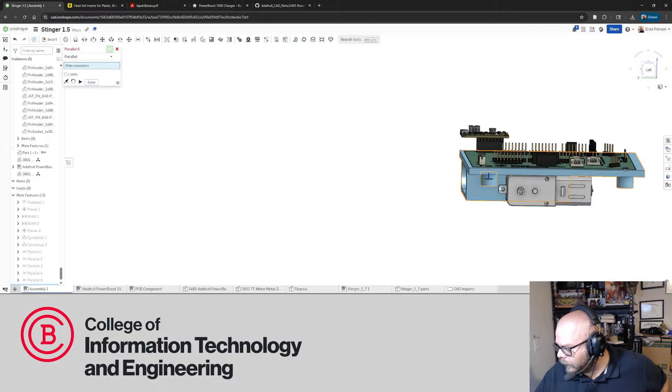So looking at that, I got like all kinds of room, you know what I'm saying? I got all kinds of room if I go out here with that motor facing forward. I don't know if I can quite get it centered, the wheel. That's not a hard requirement, but it would be kind of cool. Plus I don't know how far forward I want to get.

Spoilers upcoming, I think I've decided. So the original robot here uses the Arduino Giga R1 Wi-Fi, and I put that down as a spec when I assigned the project to the students because I didn't know exactly what they would want to do. I figured that had the most I/O, communications options, everything from Arduino's side of the world, and it gave them the most options. It turns out the Stinger, we're not even using half of the capability of that Giga. So as I was looking through things and really looking at what I can do to make this not only more robust, but draw in more students at those career fairs.

One of the ideas I came up with was adding bling, adding more stuff because we got the capacity, right? Like less than half of this Arduino board is being used.

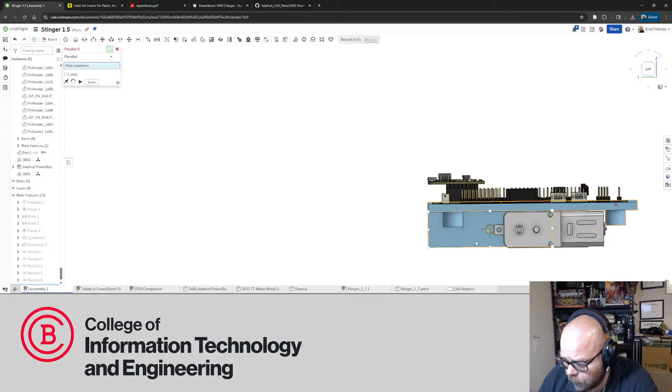So spoilers, I'm going to add some Adafruit RGB modules, LEDs. One thing I notice is that the little golf ball sized Ozobots, the students at these career fairs are drawn to those. It's almost like moths to a light in the dark, like they see those LEDs and they're all over it. As impressive as this is, like students built this, the programs the students are watching at these career fairs were written by students only a few years beyond them in school, and they're drawn to the ones with the flashing lights. Like, this is the coolest thing ever, but no, we're going to go to the ones with the blinking lights.

So I think to make this version 1.5 pop, I'm going to add basically ground effects, right? Add some LEDs somewhere. They come in like 6 LED segments, they're addressable, you can turn them on different colors, all that good stuff. And we got the room on the boards.

I don't remember, honestly. So yeah, right here - they're going to plug into a JST connector right here.

The NeoPixel from Adafruit doesn't actually use a communication line, it just uses a digital output from the Arduino. Now I got to be honest, not being an electrical engineer and only a passable programmer, I suspect they wrote their own communication and they're just pulsing this digital output really fast, making up their own communication with it. That's my guess, some version of that. Because on one output, I don't see any other way you can address things - it says they can address up to like 64 individual LEDs and turn them on and assign colors individually. They got to be communicating somehow, and since they're not using a comm line, I got to assume they're sort of faking it, writing their own.

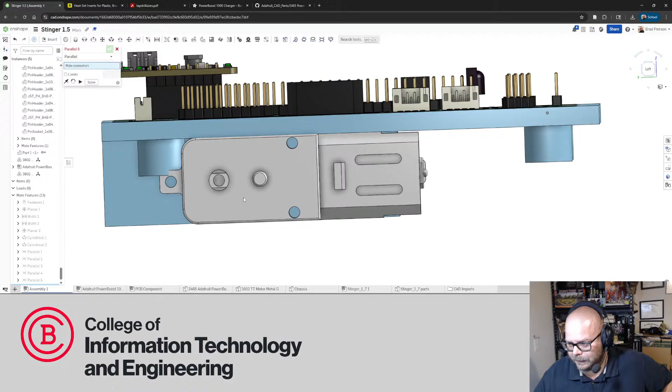But I'm almost thinking either in the middle or as far back as I can go - not the two extremes, I'm not thinking somewhere between these two. Like here, that looks like a good one. Either I shoot for dead center or shove it as far back as it'll go, and it's probably as far back as I can go. I'm going to call it, whether this is accurate or not, as far back as I can go as soon as this edge of the motor touches that screw boss - that's going to be as far back as I can go.

So yeah, all that. Whoops - what did I escape? Damn it, I had that in a good spot. I liked where I had that. Get back out here, thank you.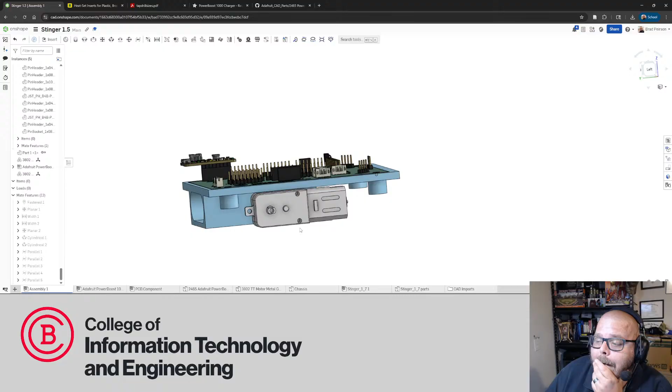Yeah, so all that to say, I kind of like that plan all the way back, I think. I don't have a good reason for that other than - so forward, I was thinking weight balance and turning radius. All the way back, the bulk of the weight of this thing by far is this battery, and all the way back looks like it centers. Well, maybe not, maybe I do split the difference. Maybe I center it for the battery because the battery is by far the bulk of the weight on this entire robot. Or maybe I center it to the battery.

So let's target that. And I also don't want to take forever - it's getting late, and we kind of need to end the stream at some point here. So that pocket is 2.8. I'm just going to assume the battery takes up the whole thing - we know it doesn't because I built in clearance, but I'm just going to assume it does. So if I shoot, I'm just going to call it 1.5 inches, let's make the math easy. I want this axle, this center, to land 1.5 inches from this back edge of the chassis.

Right, and I just made a decision. I mean, are they in the same spot? They are in the same spot, I believe. Let's measure it, let's not guess. So I was going to say this dimension - I think they're in the same plane, but let's check it.

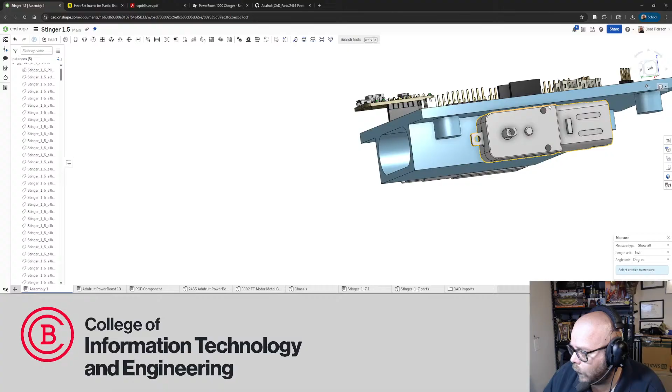Let's get a center distance. 3.1. There should be no delta in the Y direction. And there's not. So they're in the same plane this way. So if this one clears this screw boss, this motor, even though I haven't flipped it around yet, will clear this one. Right? Because they're in the same spot. So I can just play with one side for now and call it good.

But I need this center to land 1.5 inches from the back. How I do that right at this exact moment, I have little to no idea. I suppose the best thing to do would be to create a little diagram on my scratch pad. And again, there's nothing on here. Let's get the glare off it.

You guys truly trust me. Don't care. It's a throwaway scratch pad. Whoa, I must have set my caliper box on my F1 key. My scratch pad is literally that. At the end of these sessions, I can safely throw it away. It has literally no dimensions, nothing, just numbers written on it that mean nothing to me the exact instant I write them down. It's long enough for me to switch tabs. That's about all it's good for.

So the best thing, I'm going to create basically a diagram of these 4 circles and their dimensions from one another, and I'm going to use that as the basis for a pocket to hold this whole motor. And I think that is going to be the winning combination. I think. I don't know, but I think. So, just start grabbing diameters, I guess. So here, boom, to here, and I want to make sure which direction is that. I do not care about X. X is the red. I don't care. I want Y. Y, which is

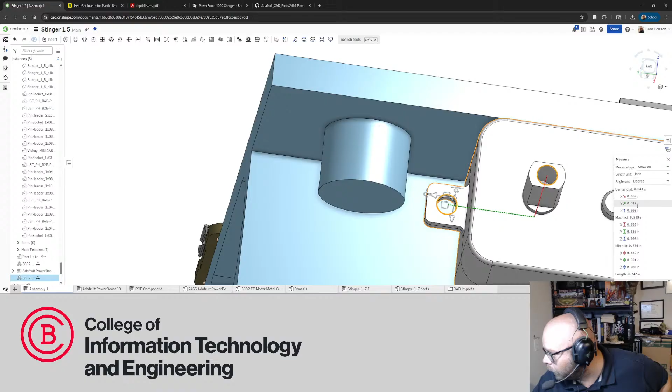.512. Now, I can almost guarantee the model for that motor is metric. So that's something to keep in mind when I go to mate. I'm not going to be able to use concentric mates. I will almost guarantee it, though, that I won't be able to use concentric mates because it is not exactly .512. It is whatever that is in millimeters. And in fact, if I do a quick conversion, 25.4, 13.0048, I will almost guarantee that model is exactly 13 millimeters.

If I take 13 millimeters, let's see if it's within rounding. I don't even know, because I don't do that off the top of my head. .511811. So I will almost guarantee that it is 13 millimeters rounded up to 3 decimal places. SolidWorks does that kind of thing all the time. In fact, so much so that I am actually going to do this one set of dimensions in metric. So we got 13 millimeters.

I'm going to try to get the glare off of this. I literally just drew those 4 dots for those 4 holes. And I'm just going to start dimensioning 13 millimeters for that one. I'm going to use the shaft as 0. 13 millimeters for that one, here to here. Center distances. Always remember center distance. I care about the green. So

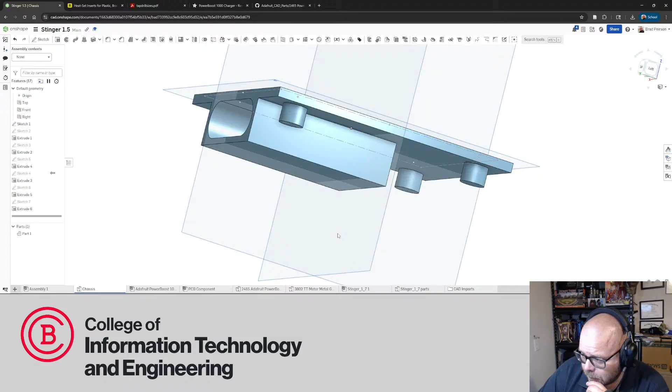I will also, not anymore tonight, but in the next stream, show you what I came up with to clean up some of these tabs and get them out of the way. I haven't found a way to close them yet. I'm working on it, but I have found a way to at least get not quite so many as we import all these PCBs with multiple files and stuff. So let us sketch.

I am going to sketch the rectangle for the feature that will hold that motor. I'm not going to dimension it yet because, frankly, I don't know what the dimensions are. And then I'm going to drop the dots in for the various holes. Boom, boom, boom, and boom. Okay.

I know these are horizontal to each other. Well, actually, let's do a left align. So I'm looking straight on. Those are horizontal to each other. These are vertical. Whoops. Come on. Deselect. The escape key doesn't do it. These are vertical to each other. And I probably could have got away with drawing a line. Does it have? Yes, it does.

So I take that back, because the easier way to do this is not with dots, not with points. The easier way I should have thought of is going to be using lines, because lines, remember, come with free points. Look at that. There, and then one vertical. I'm not going to end up using this dot except to say that you are the midpoint. Now, the other dots are the actual targets.

So here was 13 millimeters. 13 millimeters. And everything moves again. That might be my one complaint. We're 20 millimeters to here. 20 millimeters. And then apart, we were 18. 18 millimeters. Okay. So this set of lines now is our motor layout for mounting. And our box is going to be bigger. Don't worry, I will move it.

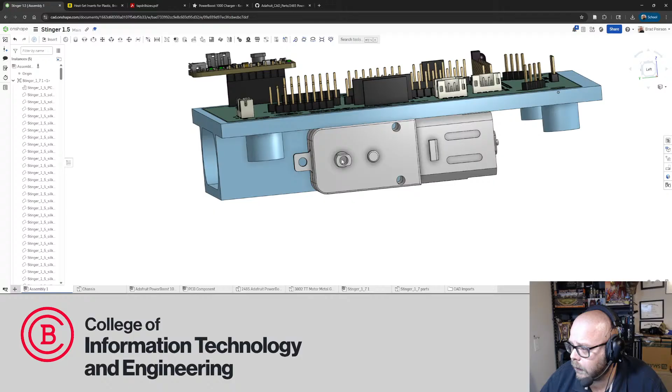But this guy needed to be 1.5 inches back from this edge. 1.5, right? Vertically, I do not know where it goes yet, but I'm about to figure that out. So let's go back to the assembly. I could open just the motor and get the same answer, but I want to know center to center from the top edge where this is. So I don't want the minimum distance. I want center.

0.087. And actually this one I am going to leave standard because I'm going to clearance it anyway. I want a little more room. I don't want it right up tight against the top, is what I'm thinking. So I'm going to go back here to the chassis. 0.087 is what it was. What do I feel like? 0.125, does that feel like enough? Kind of does to me. I'll call that good. So the holes are locked down.

All right. Shaft and then the 3 mounting holes, right? Those are locked down. Those are where I want them to be. We should be perfectly clear of this screw boss. We're clear of everybody, right? Now we need the actual little pocket. I want enough material to sort of cradle the motor. The screws should be enough, but I want a little help, especially if I'm going with 2.5 millimeter screws, and they should be 3s. I want it to sort of sit in there and have a little plastic backing it up.

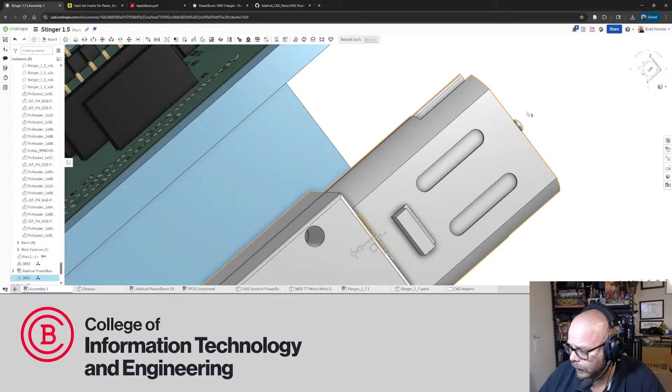So let's look at this assembly again. And how big are we? I am going to leave a good hunk. And in fact, I'm only going to take that boss that this motor sits in out to here. I'm going to have it butt right up against this. That will eliminate the need for me to create a cutout for it later. Anyway, a little pocket. And if I leave it open, the motor looks like it's going to land somewhere almost exactly where I'm showing it here.

My wires are coming out here on this side, remember, and then they'll be sort of free in space to cross over or get wherever they need to get without any plastic in the way, and I won't have to cut a channel later. So that's a bonus. Well, what do we got for width? How tall does our little thing need to be? 0.882. I'm going to go 1 inch and give it some room. I can make it smaller later. 1 inch. Chassis. Go here. Dimension, where are you? 1 inch tall.

Right? Again, I can go shorter later. There's nothing preventing me from doing that. Let's get then... keep wanting to alt tab. Let's get the dimension from this shaft, this center point, to this tab, because that'll be the back of what I'm about to extrude. 1.582, and again, probably metric, 1.582, times 25.4. Ooh, actually, maybe not. 40.1828. That looks kind of goofy. What if I do 40 even?

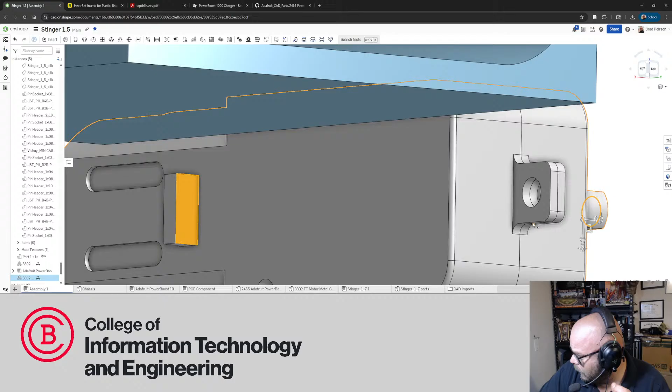5.8, that's not 5.82. 40.2. That's also not. So, I mean, I'm thinking with this one, we stick with the old Imperial. Call it a day. 582. I do want to be a little short because I don't want to bind up, right? I don't want to hit it. And this little tab will also give me some torque hold. So if the gearbox wants to spin in there, this little tab hitting plastic on the way around is a good thing. From that perspective, I don't want to give it much.

5 thousandths, 2 thousandths. I'm honestly leaning towards 2 because if I go with a 2.5 millimeter bolt, I'm going to have a lot of wiggle in my holes. 1.58 sounds good to me from the shaft. 1.58. So let's do that. I'm also going to make these construction before I forget about it, because those are really just references for the points. 1.58 is what I decided, yes. Here to here. At 1.58. And that'll be the end of that.

Let's go to the left. Oh, God. It's really going to make me do that and not have that even. That is going to so bother my sensibilities of good design. That's, ugh.

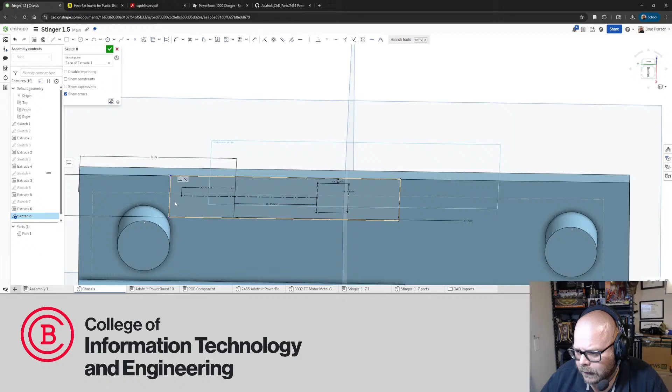Now for this, how deep do I need to go? Again, the point of this whole streaming thing was to walk through my thoughts. So my thought, this is that outer mounting tab, right? Not the power boost. This outer mounting tab. My thought is this is going to land, like that tab is inside this screw boss, right? So where I have this drawn, this edge of the block I'm about to extrude is probably exactly where it needs to be. Probably pretty close.

I kind of hate it there because as I extrude it, it's going to hit this boss and there's going to be an ugly curve in and then back out to a block. I'm thinking aesthetically, even though it doesn't need to be that big, if I bring it all the way out to like the center, when it hits that, there will be kind of a nice curve back into the block instead of an ugly curve into the block. That's kind of, I think, what I want to do. How deep am I extruding? That was the question I started with. I want this face flush with this face. So really, I just need to know the depth.

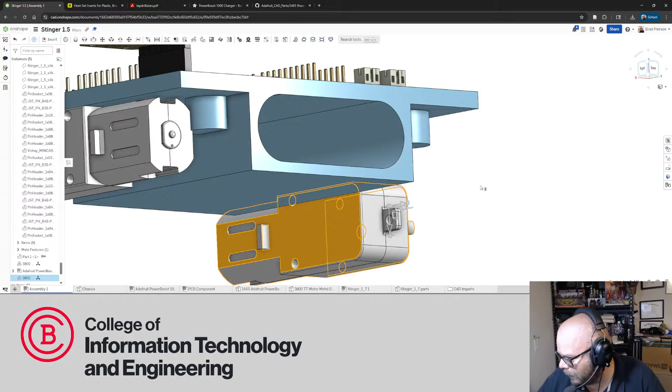732. .75 is not enough. That's only 10 thou. We're going to go .875 deep to give us an 1/8 of an inch wall. Nope. I take that back, deeper, because we need... Did I ever get M2.5? These were the M5s. I need the heat set inserts because I need to know how deep the hole needs to be. We're going to go M2.5, with the biggest depth they got, which is this one. Material thickness 6.5 millimeters.

Again, convert, 25.4. A little over a quarter inch, 256. We need a quarter of an inch of material on top of this thickness. So that's already at an inch. We need to go an inch and an eighth deep, at least. Sounds like a good round number, right? And then this guy, can I do it concentric? Coincident? Hey, look at you. Now we're perfectly centered on that screw boss. I can make that line perfectly line up with where that hole is going to be. It's going to be perfect.

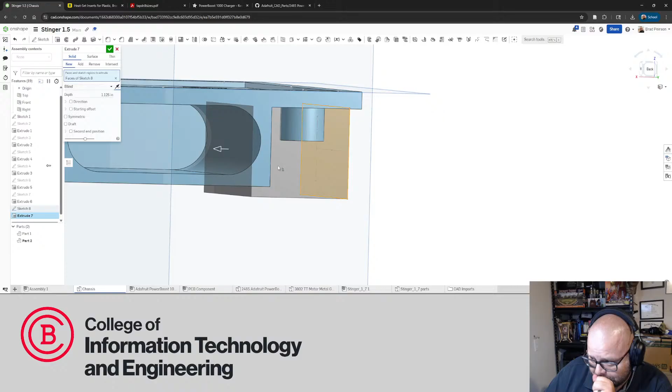Accept that sketch. And I said we wanted that to extrude 1.125 in the other direction. We are into the battery compartment. However, that's not a terrible place to be, because we're into the battery compartment plastic. Where we are not is into the battery compartment itself, right? If we had gone deep enough to be into where the battery sits, that would be a problem. We did not go that deep.

Why is that a separate color? That is a separate part. I don't like that. No. Why did you do that? Why did you do that? Did I not?

Why are you a separate part? Was there a merge? I mean, SolidWorks used to have a, let me see, SolidWorks has a merge. Add, there we go. I was on the wrong damn tab. Oh, God, scare me like that. I mean, not that it would have made a huge difference.

So this, it's going to be way uglier than I was hoping. We can get, I'll tell you what we'll do. We'll pretty that up later with, like, say, a massive chamfer. Because we got extra material here to play with. I can do something crazy like chamfer that.

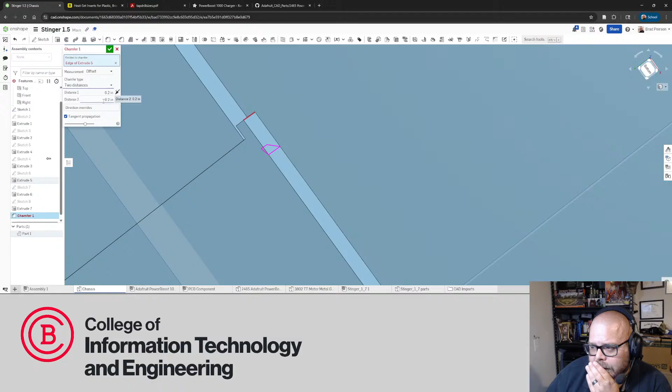And it doesn't even have to be equal distance. It can be two distances. Distance 1, distance 2, right? And I mean, I can basically, I don't know which one's which, honestly. Let's do 0.1 there. So, I mean, I can play with it, but 0.05, you know, make a huge chamfer like that. We can later on make it pretty.

I could even do something completely nuts, like cut a very shallow arc so that it's perfectly tangent and all. Yeah, not worried about it. It's ugly right now. My usual workflow is the style that I mentioned before, where I would have made this one big block and started cutting pieces out. The difference being that to do this properly, by adding, I just have to get over some of that stuff and know that we can do little tricks at the end.

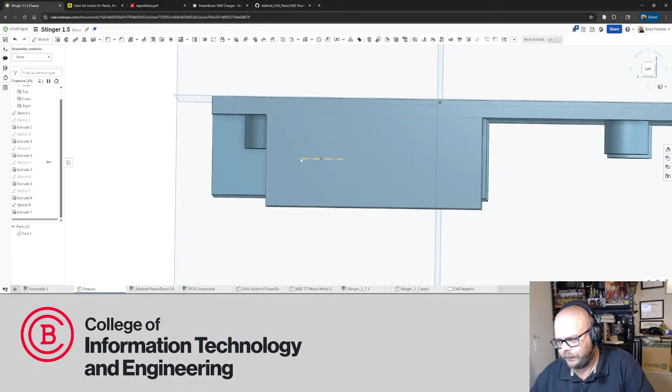So I think we're getting close. I don't like to run this more than like 2 hours if I can help it. And I think the last thing I'm going to do is just sort of cut out. Do I even want to do? Let's show this sketch first, because it's got the holes and that's where we want the motor to land, right? And everything's going to be based off of where those holes are. The holes are the most important part. The pocket can be oversized, ridiculously. So those holes are the important part.

And we need to make a cut. How do we do that? Maybe I will call this here, because this cut is not as simple as it seems. I need to cut the full depth of this motor, except for where this tab is, I need to cut less than half because it has to have some plastic to sit on and an insert to go into. And that's going to take some measuring and scheming, which honestly isn't too terrible. Like, we're going to sit in here somewhere like this. Not too terrible, but it's getting late and I'm getting tired.

So I think that's where we're going to call this stream. That's a good place to stop. That is where I will pick it up. Again, the week gap between streams kind of sucked. It was hard not to finish this. I thought about it quite a bit, but I'm going to switch over to the full screen.

Again, thanks for watching. I hope you find these useful. I'm going to keep doing them, even if it's just me talking to myself. Because part of it is hopefully you get some use out of an engineer with a lot of SolidWorks experience talking through some of these design decisions. Some of them are measured, some of them are completely made up. I'm fully willing to admit that. But the other part is, as a teacher nowadays, I don't get to do a lot of this engineering work, and sometimes I got to have a little fun too. And I truly enjoy this. I nerd out over it. Hopefully that much is obvious in these videos.